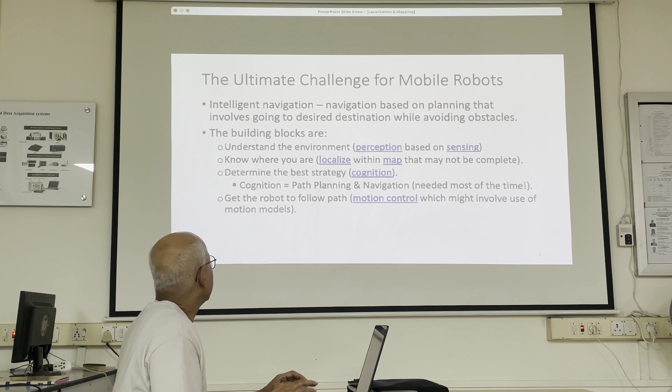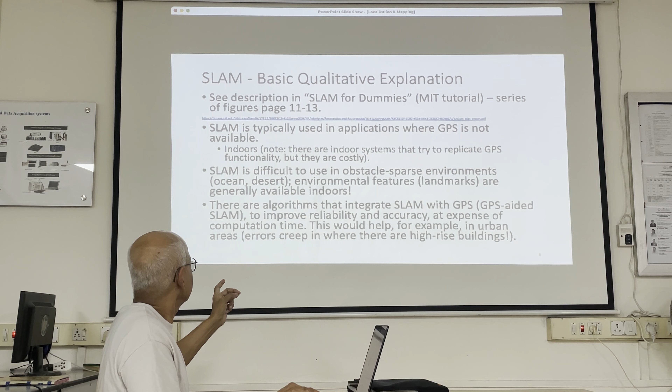So yesterday, I think we went through all of this and this one and this one. I know exactly where I stopped, because I was telling you that you can do SLAM with Bluetooth.

If you have odometry and there are Bluetooth sources, like every cell phone is a Bluetooth source, it is possible in a room to locate someone accurately with Bluetooth as well as locate a robot with Bluetooth and odometry. We also pointed out the two classic papers on this, the guys who came up with SLAM, Hugh Durrant-Whyte and Tim Bailey.

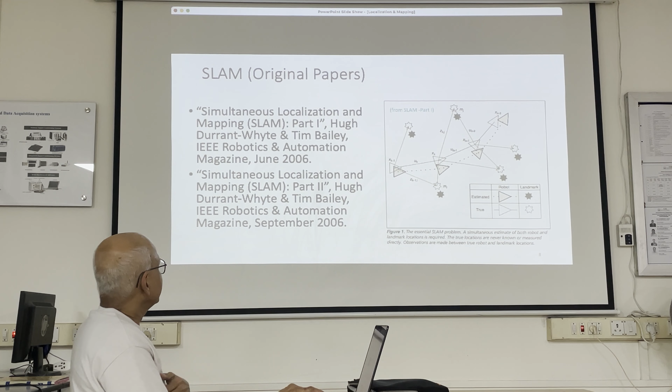So we are going to discuss the challenges of localization, because it's not a problem that's going to be solved anytime soon. First of all, you can't get 100% accuracy. Nothing is 100% accurate in the real world. But also, it's a problem where the accuracy has to be incrementally improved. Some applications need higher accuracy than others.

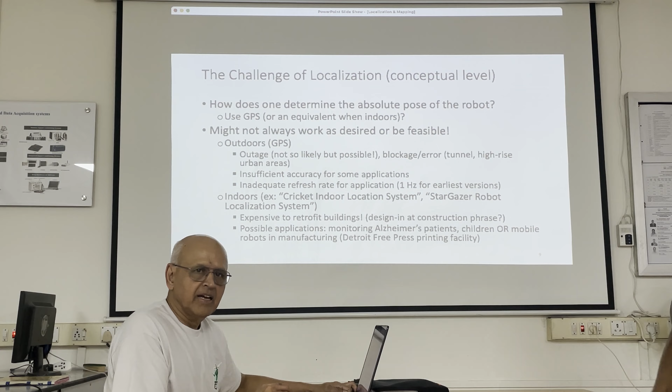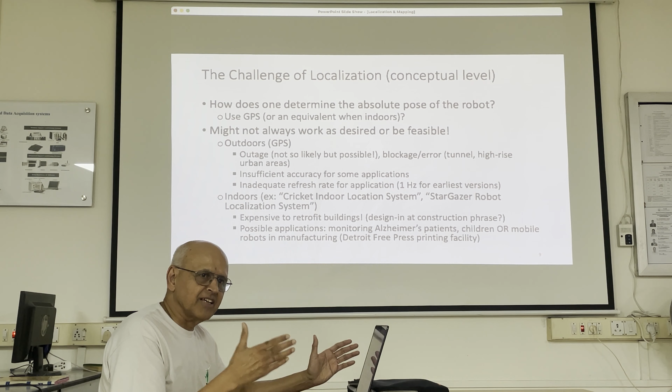The example I gave you was that if you have a robot navigating a minefield, the accuracy required is something different than a robot going down the hallway. Similarly, if a robot is going next to a swimming pool and it's not waterproof, then it's got to be extremely accurate in its localization because it can't fall into the water.

So the question is, how do you determine the absolute pose of the robot? Now, GPS can be used outdoors, but there's no GPS indoors. We talked about some of the problems of GPS outdoors also, such as you can have outages, and you can have outages that are actively caused by countries nowadays. They're all preparing that if there's a war, they want to black out the GPS of the opposing country.

Elon Musk has all these satellites, the Starlink system, so many satellites, and yesterday somebody in Russia was saying that they know a way of knocking out all of those immediately. So outages are possible in that context, but not in a normal context anymore because there are too many satellites.

And then of course, inside a tunnel, you can't get a GPS signal, so you have to do without it. If you're using it to localize, then temporarily it won't be available. You've got to do something else, follow the walls of the tunnel, and then when you get out of the tunnel, pick it up again.

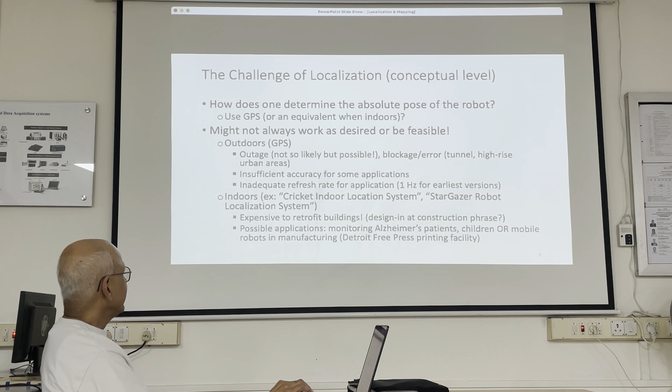In New York City, the GPS signal becomes unreliable because of the multi-path phenomena, bouncing off many of those tall buildings. And then you have this problem that GPS by itself is not accurate enough. You have to do something extra with it to make it accurate.

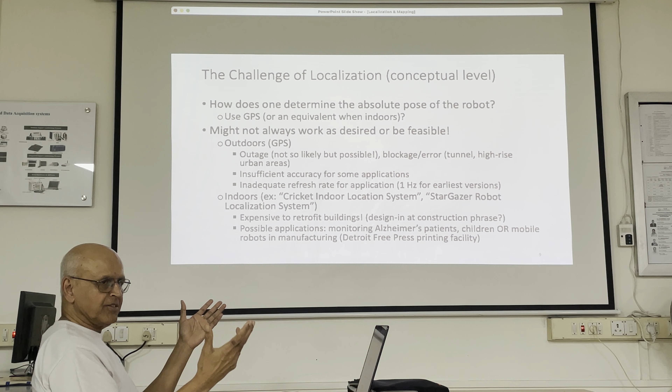The original GPS was accurate to like a meter or more. If you needed to take an exit from a highway, 1 meter, 5 meters, even 10 meters might be enough. But for other applications, it was not accurate enough. And of course, the repetition rate or the sample rate is 1 hertz. So if you're going at 200 miles per hour, then 1 hertz is not going to be enough. If you're going at 50 miles per hour, it might be enough. So everything is relative. A number is not instantaneously good, it is in the context of what application you are using it for.

Now, you'd be surprised, I started to say that and then I looked at this bullet, that there are indoor location systems available now. Now these companies might be out of business, I checked a couple of years ago, Stargazer and Cricket. So they are a means of creating a GPS-like system indoors.

Now, where would they use it? Typically, in cases where you need to monitor patients with Alzheimer's or even children, because you want to give children and even people with Alzheimer's some freedom. You don't want to tie them down or handcuff them to a wheelchair, because that affects the quality of life. So you want them to wander in the grounds of the facility, but not exit the gate and walk across a road with fast moving cars.

So they have this system whereby they're being monitored, and if they get out of the building, there'll be an alert. The way they do that is they all wear tags - these patients and children, same thing. Dogs have tags nowadays, even cattle are given tags, because you don't want the cattle to wander away on the farm. So they do have an indoor system.

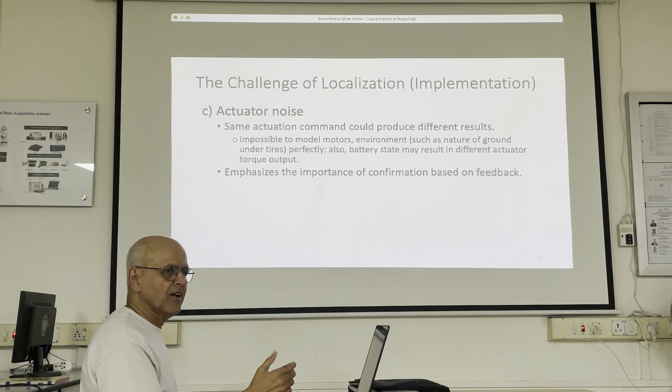You call that noise in the sense that you issue the same command, but it ends up in different places. That's called noise, because there is some ideal place, and there are all these other places that you get. So you can think of it as random around the ideal motion. It could be the ground under the tires. Maybe on a different day, the tires are slightly underinflated. It could be any one of those factors. On the same day, it might happen too - maybe it's a little bit warmer now, and when it warms up, the tire pressure increases. So it could be that. That's called actuator noise, and that's why feedback is so important, in most things in life, but definitely in robot motion.

Now, we already talked about this when we first brought up odometry, but I'll refresh your memory. Odometry uses wheel rotation sensors. I believe I may have shown you a picture of an encoder - it basically has these alternate black and white sectors on the wheel. So when the wheel rotates, a beam of light is interrupted by these black and white sectors, and you can count the number of pulses.

So counting the number of pulses is fine, but isn't there a difference between 2,500 pulses around the circumference and 5,000? Because 5,000 enables you to measure the rollout of the wheel at half the distance compared to 2,500. So if you're turning right in the middle of one tick of the encoder and the next, is it the previous tick or the next tick? Well, obviously you're going to go with the previous tick. But if you put more ticks, maybe you'll get another tick, and therefore you'll be more accurate.

So therefore odometry, for this one reason, can't be accurate, because it might turn in the middle of two ticks, and there's no way you can actually measure that because you only have a certain number of ticks. It won't solve the problem if you have a million ticks. It'll make the product more costly because your pulses are now coming in so fast you have to process it, but you still have a problem of localization.

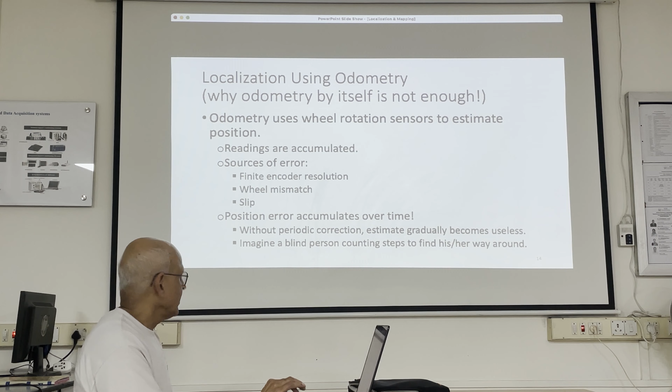And there's the question of slip. So even when you think you're not slipping, you actually are - you just don't notice it. You'll notice it more when there's ice, but even on regular terrain there are little micro slips going on. A micro slip means that you get encoder count, but you haven't moved. So that means there'll be error.

Now, the problem is these position errors accumulate. They add on, they don't cancel out. They keep on adding on. And if you don't correct it periodically - that's the old example, counting the steps, right? At some point you have to look up and say, okay, I'm at the end of the hallway.

Now, it seems silly me saying that because we do it automatically, but to get a computer to do what a human being does is a big task. So we have to think of it as a human being counting steps and then looking at the scenery to see, did I make it to the parking lot? Am I going in the right direction? So you use visual feedback to check whether your steps are taking you in the right direction.

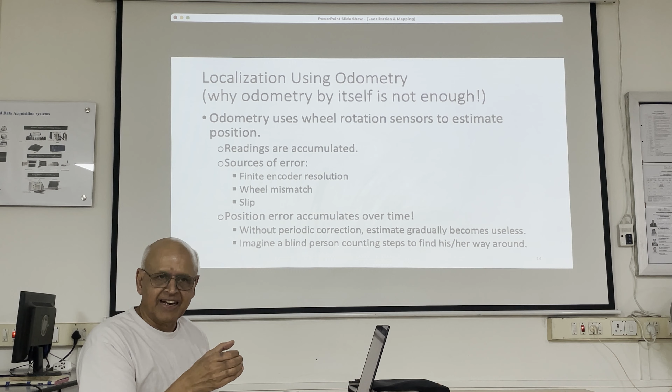So the blind person is the best example of that. A blind person would also be lost, but you know what a blind person does in their apartment? First, they organize the furniture in a certain way and get used to it. If you move that furniture around, you're going to screw up a blind person's system completely, because they depend on that, like a familiar sofa. So they grab onto it, the door of the refrigerator, or the door to the bedroom. That's how the steps, the odometry, is - the steps - and then they correct it by that GPS, their own GPS, which is grabbing something that is familiar.

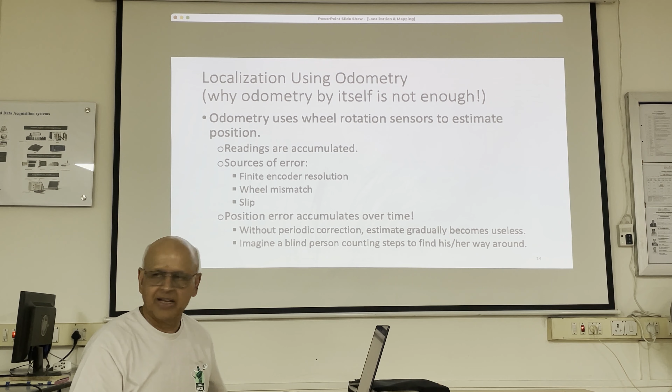So there are three types of error because of odometry problems. One is range error - what is the total distance you have traveled? That is the most favorable of the three errors. That error takes the longest to fall apart. So even with slips and all the other problems, your typical total distance recorded by odometry will have the smallest amount of error. So generally it survives longer.

The culprit is the turn error. Because the moment you get this slip, you think you're facing here, but no, you're not facing there - you just slipped, but you're still facing here. So imagine you think you're looking here, but now you're looking here. Now, if you proceed on these two diverging paths, you can never recover from this, because now you think you're pointing here, but you're pointing here. But now these two paths are going to fall apart, diverge, from that point onwards. So that's why the turn error is deadly.

And if you have more turn error, the odometry will fall apart sooner, and you'll be praying for GPS or some other form of correction. And drift error is the accumulation of the turn error - so turn error accumulates, and that's called drift. So it's definitely not self-correcting. It won't correct itself, you actually become worse and worse. So you'll see in the form of an experimental study exactly what happens to it.

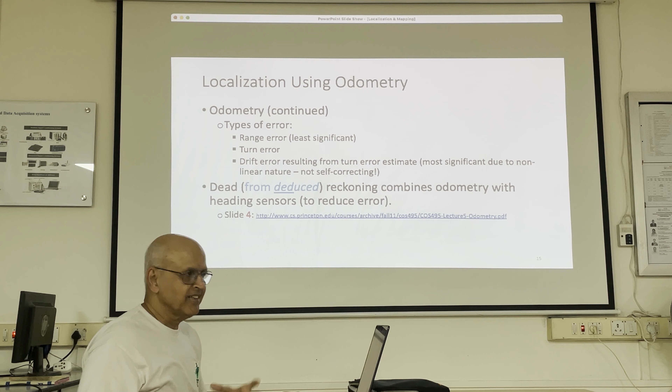I just told you that turn error is the worst possible thing that can happen to you. That's why sometimes people add heading sensors, not quite GPS, but heading sensors like a compass. So you can immediately correct because the compass will still point in this direction. So if keeping odometry alive longer is more important to you, add a compass to it, and it will compensate for turn error.

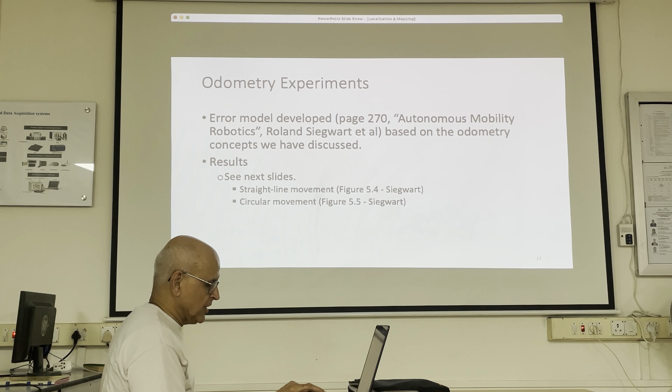In this book, which is a popular autonomous mobility robotics book, this guy Siegwart is from one of the top robotics schools in Europe, ETH Zurich in Switzerland. He did a study, though actually I think it's from his book, but not his own study. These figures are produced from that study, and there are two of them, the next one on the next slide. Let me explain what this is.

I don't know what your exposure to probability is, but I'll explain it intuitively. Many things in life are governed by the Gaussian distribution, also known as the normal distribution. Like heights of students in this class, there's going to be a spread, and typically it will fit a Gaussian.

If I pick you up, turn you upside down and shake all the change out of you, we'll get a distribution. There'll be very few people with 1 crore in their pocket, I don't know, maybe you. So there'll be very few at the two extremes, or zero, but a lot more in the middle. That's what the Gaussian is, it represents the law of life.

Most things, not all things, are Gaussian distributed. Most things are. The point when we die, definitely Gaussian.

There is a probability that you can get infinity, but the chances are low. You can get a point way out on one side or the other, but the chances are very little. What is the probability that a person is 15 feet tall? I haven't seen anybody like that. Probably not. So all the extremes live on the wings of the Gaussian, and the chances are not much.

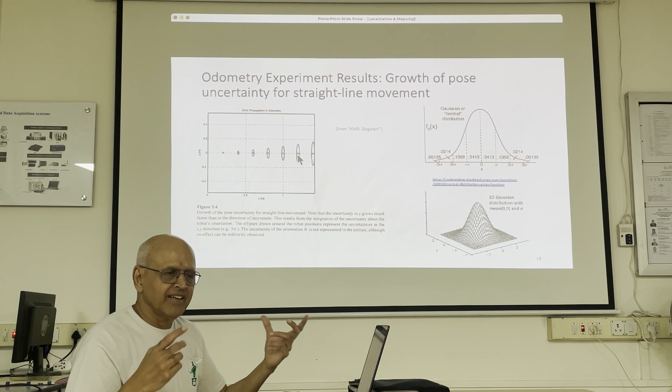So this is a two-dimensional Gaussian, drawn as an ellipse to show you a two-dimensional Gaussian. In other words, it's a projection, a section of this, maybe at 3 sigma. Imagine a 3 sigma cut. Remember, 1 sigma cut for a one-dimensional Gaussian is here. Similarly, for two-dimensional, you have to do two of them. So he's doing a 3 sigma cut, and what does it show?

Remember I told you the range error is the least? Well, the Gaussian is not growing much in this direction, so the uncertainty is not growing very fast here. This way it's growing quite quickly. What's the reason? The turn error. It says there's a chance it could be here, or here, or here, and that chance seems to be expanding sideways as you go. That's what I meant—odometry is going to fall apart, and the turn error is the culprit. Range error is fine because it's compressed this way, it's expanded out this way. That's the problem with it.

Now, this is this old circle. So he gets the robot to move in a circle, and this time the ellipse is like this, getting bigger and bigger. Something odd is happening here.

You would think that it would grow perpendicular to the path, but here's a comment that says the main axis of the uncertainty ellipse does not remain perpendicular to the direction of movement.

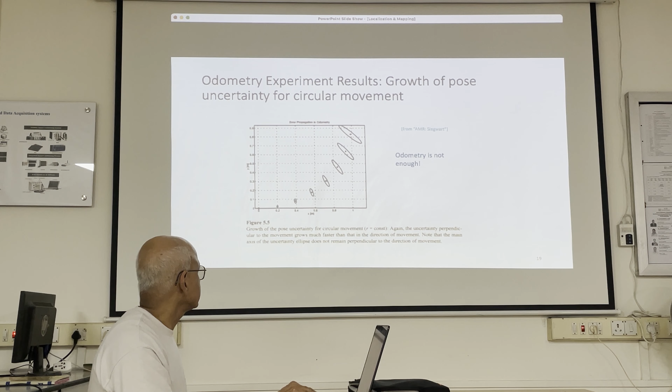So odometry is not good enough. It's going to need help, right? We know that. It's like counting steps, and then you have to look up every once in a while. You don't have to look up constantly, though human beings do.

Actually, we don't do that. We look at our cell phones a lot these days. So have you heard about these stories of people looking at their cell phones, walking down a sidewalk, and running into a pole? Very true.

So is that localization error or just stupidity? It could be stupidity because they don't have a map of the environment in their heads, right? They're just counting steps in their heads and walking, looking at the cell phone, and they hit a pole. There have been people who have stepped into traffic and got killed. Like they don't realize that it's a red light, and they walk right off and get hit by a car.

So you need help. So what is this help? GPS is the easiest way to do it. Indoors there's no GPS.

You can also do IMU. So IMU replaces odometry for skid steer vehicles. For vehicles that move without rolling tires, right? Well, skid steer vehicles also roll, but when you turn, they have to skid. Because how do you get from here to here when you don't have a steering wheel? You have to run the left wheels faster than the right and you skid this way, just like a tank.

Some people use IMU and odometry because remember, redundancy is good. So some people, they want a good localization system. They add an IMU even though they have odometry. Then you have a three-way fusion of information: IMU, odometry, and GPS.

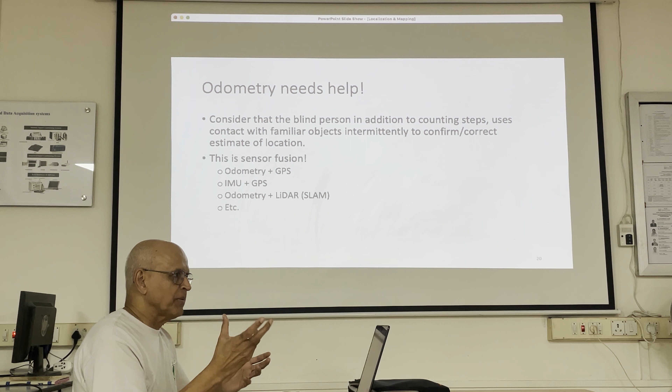So there was the story of a lady in the middle of winter in Montana. She went off the road, snow everywhere, and was in the ditch. She had not told any of her family or friends where she was going. And they located her just from the Wi-Fi signal. So that is a kind of Wi-Fi SLAM in a way, because they found her before she died, as the cold would have killed her. They located her purely from her cell phone signal to the towers.

Now we're going to watch this. We just watched it a couple of times already, right? But it's a very nice video that illustrates the concept of SLAM. Now, I keep telling you this, if you get into the math, then you're going to commit suicide. So the math should come later, maybe much, much later. You have to understand the concept first of what SLAM is. So let's play this video.

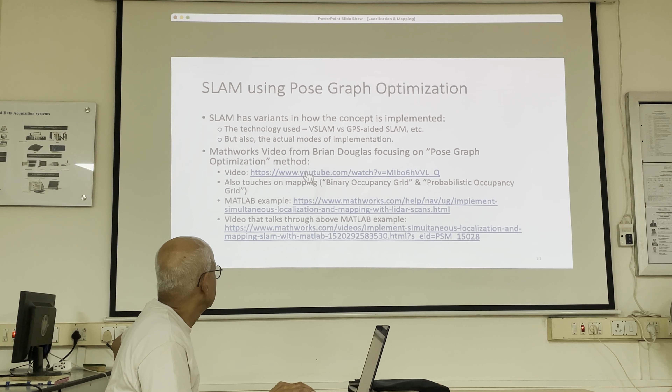That's not the one. What is it doing? This is a CNN... this happened to me a couple of times yesterday and I couldn't figure it out. That, and this morning I tried it, it gave me the right one. Now it's a CNN news item. So I'm going to cut and paste it this time. Let me, or maybe I'll just Google it, because it might do the same thing.

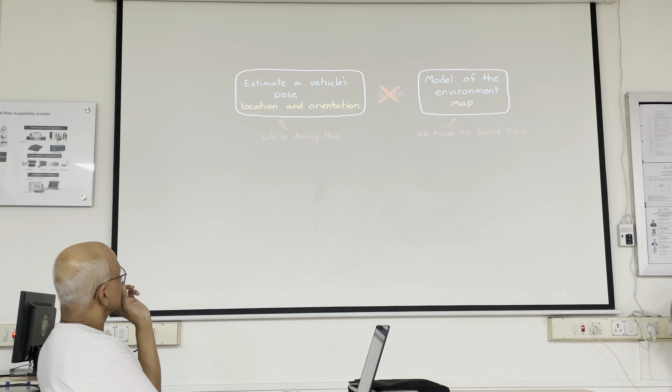In the last video, we talked about how we can estimate an autonomous vehicle's pose, that's its location and orientation, if we already had a model or a map of the environment. In this video, we're not going to have a map ahead of time. We're going to have to build one while simultaneously figuring out where the vehicle is within that map using a process called SLAM, Simultaneous Localization and Mapping.

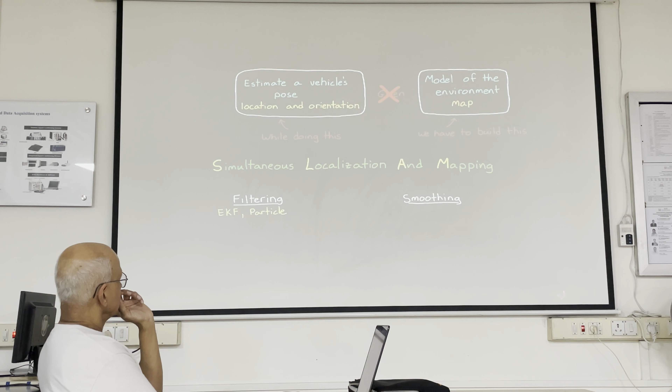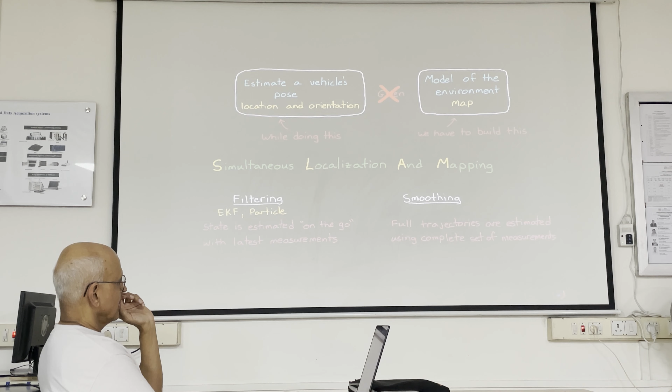There are many different SLAM algorithms, but they can mostly be classified into two groups, filtering and smoothing. Filtering, like the extended Kalman filter or the particle filter, models the problem as an online state estimation, where the robot state, and maybe part of the environment, is updated on the go as new measurements become available. On the other hand, smoothing techniques estimate the full robot trajectory from the complete set of measurements, not just the new measurements. Understanding these methods can be more intuitive if we address them under a graph-based formulation.

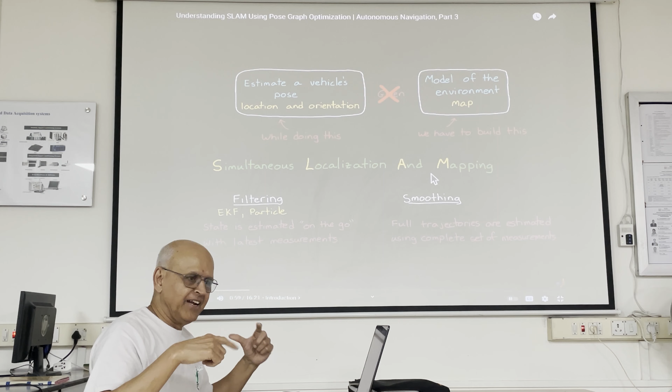So let me give you a little bit of background. This was a classical technique, which is what I was describing to you yesterday in class. So you keep going, the barrels move, right? And every time you get a LiDAR view of the barrels, you again correct your position, because you've seen them from a different position. Odometry tells you how far you've moved. You take new readings using a LiDAR of these very same obstacles, and using that you're able to correct your position. So you never return back to things you've seen before.

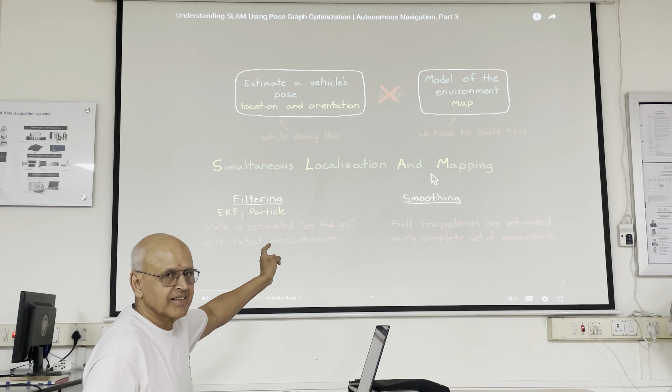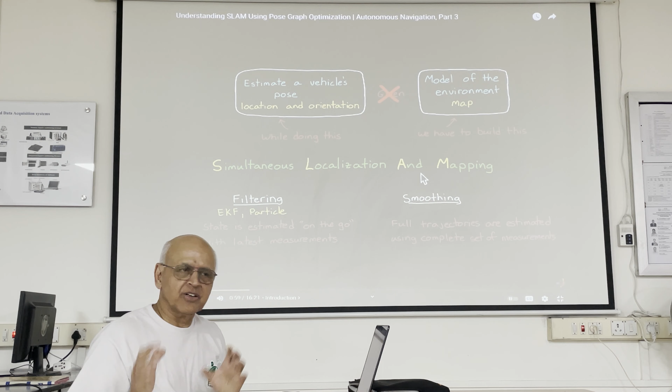So that's the filtering method. The problem with that is you have something we already used the word drift. The error, even though it grows slower than with odometry alone, does grow. So it keeps growing. The second method I'm going to talk about uses a method known as pose-graph optimization. That method is known as the smoothing method.

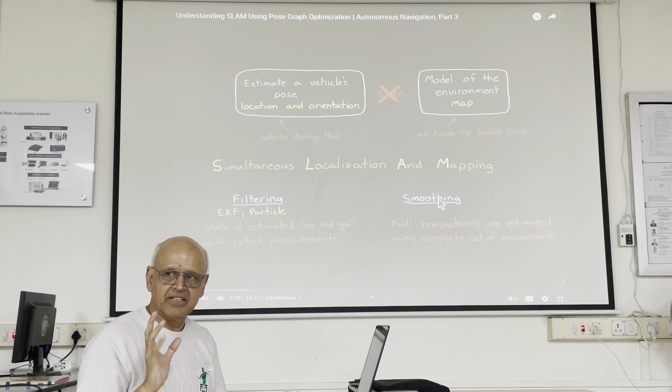But it requires you to revisit the parts of the environment that you have seen already. Now you can see, this is one of life's trade-offs, right? Life is full of trade-offs. You won't get something for nothing. You always have to give up something to get something better.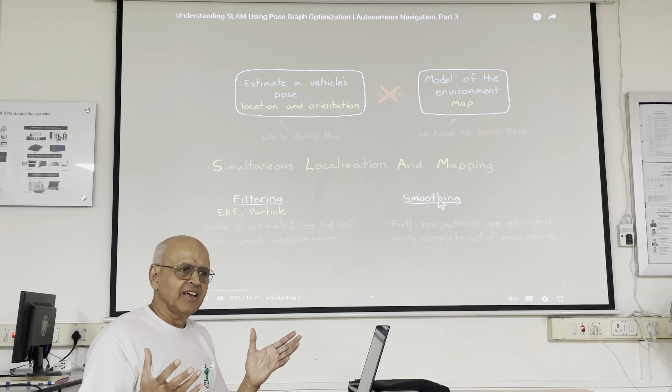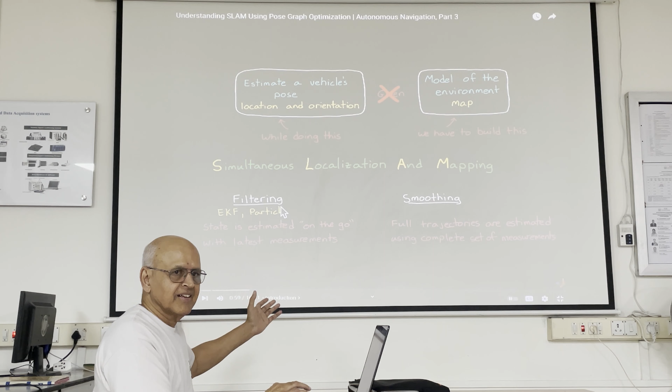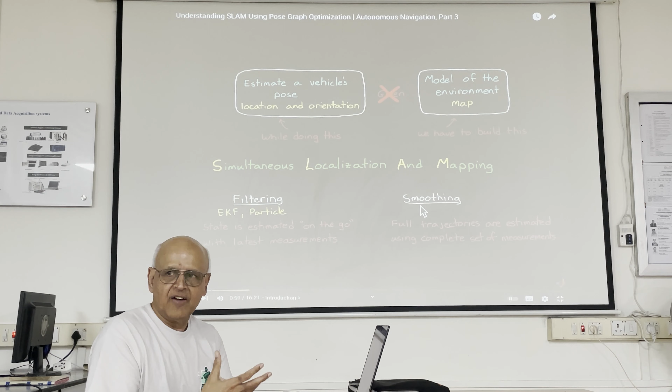So what is the problem with going back to previous areas? If you're in a battlefield and you're developing a map as you go, you don't have the time or the luxury to go back and make your SLAM more accurate. You have to keep going. So you're forced to use the filtering method. This doesn't require you to revisit areas that you've already been in. In an earthquake, when people are dying, you're not going to even have the time to do that. Yet it's a better method if you have time. And apparently most people use this method, provided they have the time, of course.

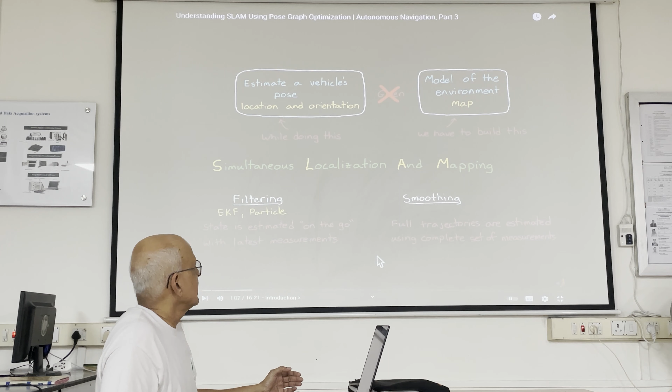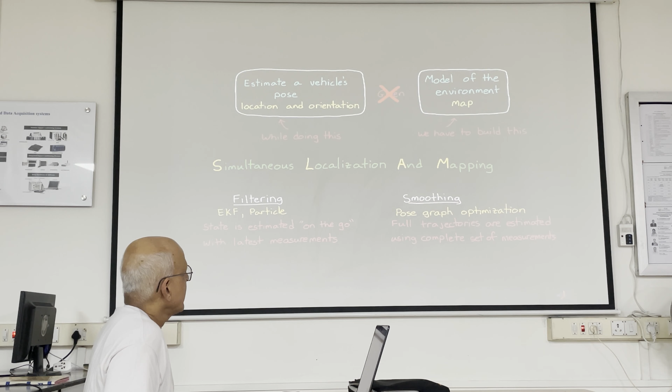So let's continue. In recent years, one particular framework, pose-graph optimization, or more generically, factor graph optimization, has become the de facto standard for most modern SLAM software solutions. So in this video, we're going to focus on understanding what pose-graph optimization is and why it works. I hope you stick around for it.

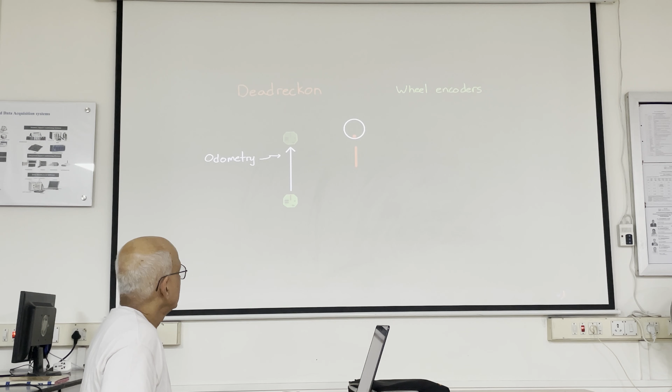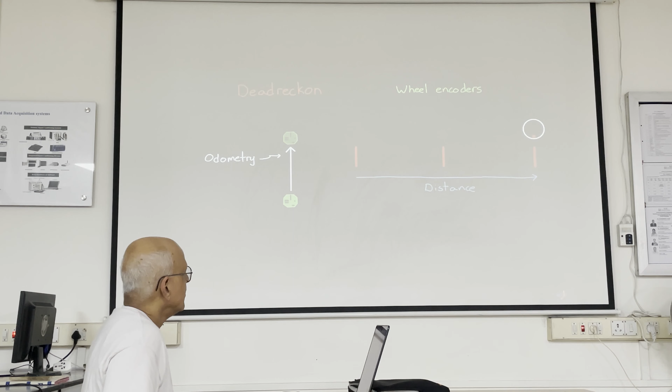Let's set up the problem. We have an autonomous vehicle, a robot, that has the ability to move through an environment. We've given it LiDAR to sense the distances and angles to nearby obstacles, and we've given it a way to dead reckon its relative position over time using odometry. In this case, it uses wheel encoders to count the number of rotations each wheel makes as it drives, and from that it estimates how far it's gone and how it's turned since its last known position. So the question is, how can we use these sensors to understand what the environment map looks like and figure out the robot's pose over time?

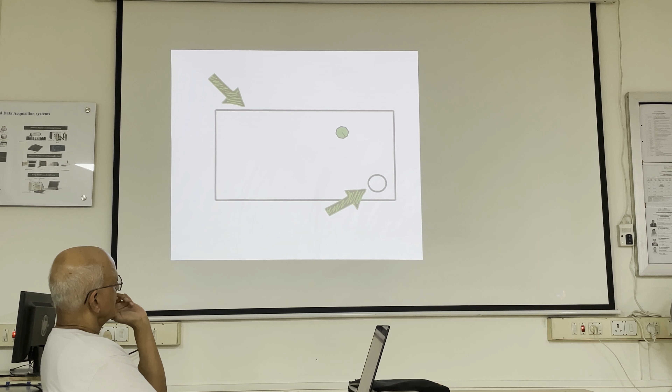Well, let's start with a simple mapping problem. Here I've placed the robot in a rectangular room with a circular obstacle in the corner. We can see this map and see where the robot is, but it has no idea of either. To it, it's just in an unknown void.

Let's start with a very ideal situation, one in which there is no uncertainty or errors in the LiDAR or odometry measurements. They're just perfect.

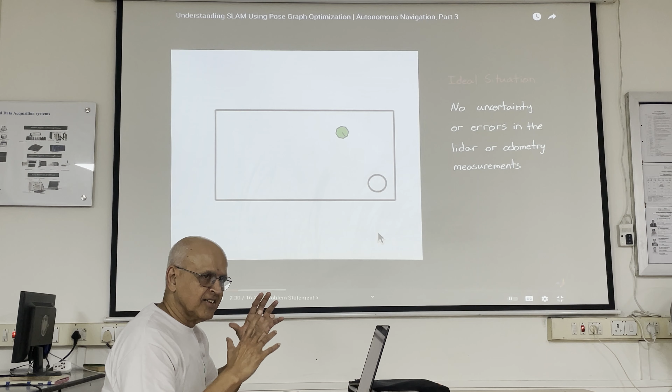So that's not possible, right? So he's assuming that just to make a point. You'll see how easy mapping is now in that scenario.

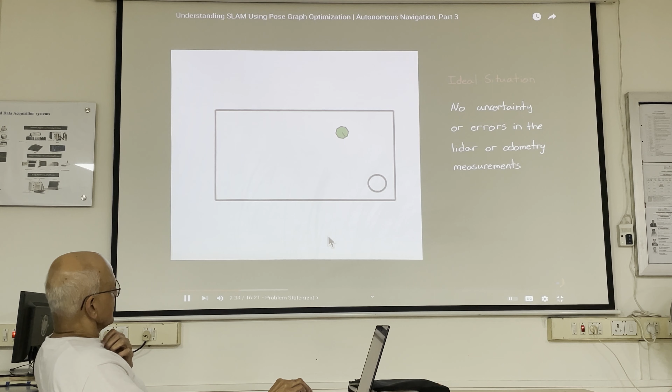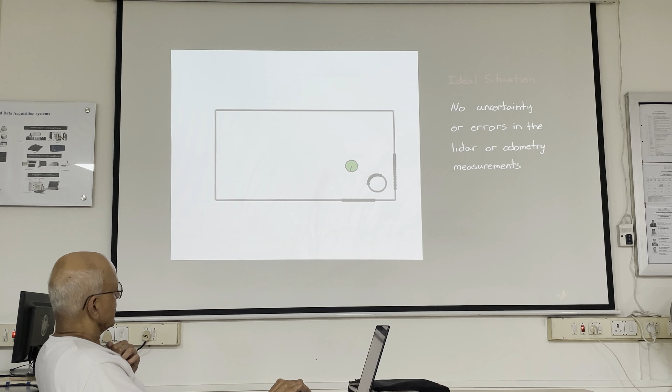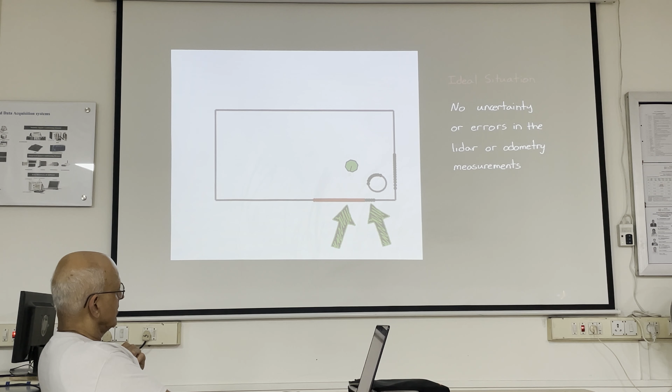In this situation, developing a map of the environment is relatively trivial. The robot could take a LiDAR measurement, and we'd have confidence that what it measured is the real obstacle location. It could save that off in a global map and then continue on. After driving some distance, which again, precisely because of the perfect odometry, it takes another measurement. Now the two measurements will align nicely in the global map since there are no errors in our system, and in this way we can just keep driving all around the environment and create a perfect map, all while knowing exactly where we are at all times.

Of course, this scenario isn't realistic. There's error in both the LiDAR measurement and in the odometry, so there's some uncertainty in the estimated robot pose and in the distances to the measured objects.

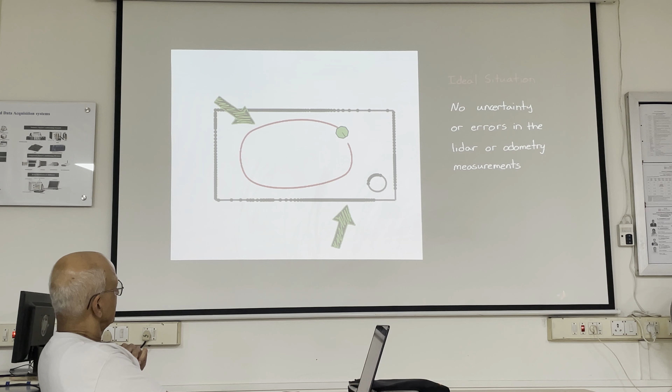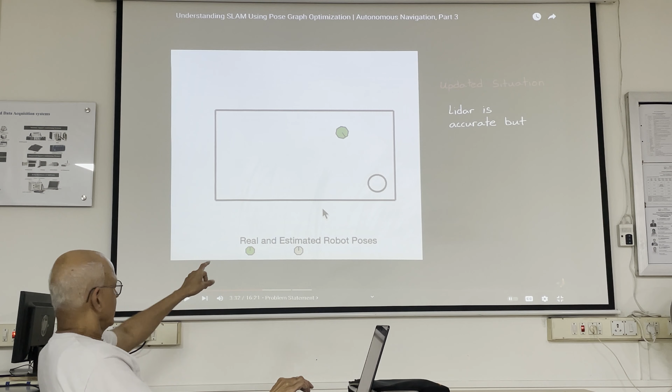So let's try to map this room one more time. But this time, the LiDAR is still pretty accurate, but there's a large uncertainty in the odometry measurements. Green is the true position, and gray is the odometry position. I don't know, maybe one of the wheels keeps slipping, so the robot thinks it's moving in a different direction than it actually is. So let's see how this works out for our robot.

We get an initial LiDAR measurement, and we assume that there's an obstacle there just like before, and then we drive a little bit. Except this time, the estimated pose is different than the real pose. So the LiDAR returns some relative distances to the wall that the real robot sees, but we can only assume that it's relative to the estimated robot pose, since that's all we know. This places the two measured obstacles in different frames, and not a global environment frame, so they don't line up.

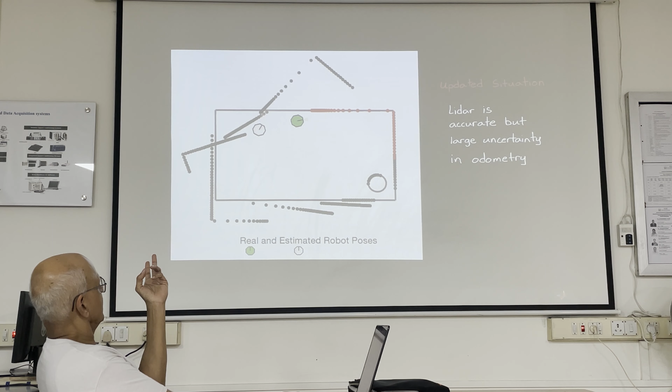If we continue this process, as we drive the robot around the room, the error in odometry causes our estimated pose to deviate more from the real pose, and what we're left with in the end is this map of obstacles that doesn't resemble the real environment. So this is one of the reasons why we can't just take measurements of the environment and stick the results into a map. Uncertainty in our system is going to mess it up.

But this is where SLAM algorithms can help us. As I said at the beginning, in this video we're going to focus on pose graph optimization. I want to provide a little intuition behind the algorithm and give you a feeling for how it works without a bunch of math. But if you want to learn more about the mathematics, I've left some great resources in the description that go through it in detail.

Just like before, we have our real and estimated robot poses, which at the beginning lie right on top of each other in the real environment map. But now on the right, there's also this blank area, and this is where we're going to build up the pose graph. The first thing our robot does is take a measurement of the environment.

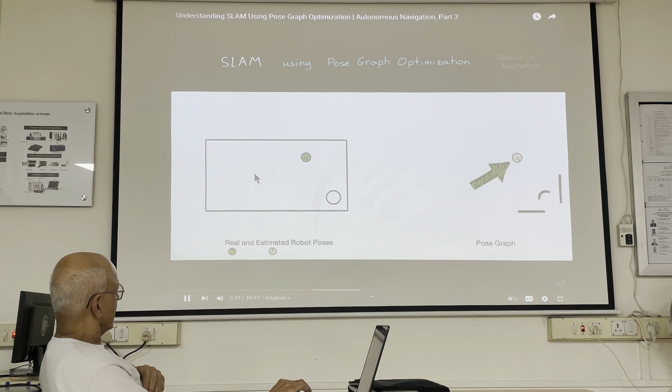This measurement is associated with the current estimated robot pose, and we can add both to the pose graph. So essentially what we're doing is saying that this pose is defined as an X and Y location and a rotation angle. And along with it, we save off the distances and angles to the sensed obstacle.

So he's saving both the odometry pose as well as the view. So it's a lot of memory. And you have to do a lot of calculations, right? We're not doing the calculations, but you'll understand the concept when he finishes up.

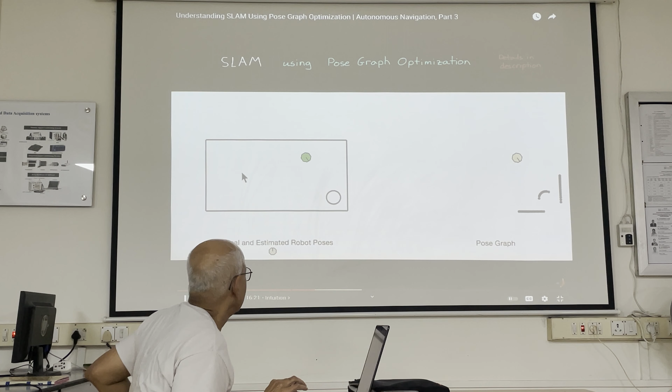Now, there's also uncertainties associated with this pose entry, but I'll get to that in a second. All right, so we have our first entry in the pose graph, so let's get the second.

Again, the robot drives for a little bit, and our estimated pose starts to deviate from the real pose. Another measurement of the environment, which gets associated with the new estimated pose, and this combination is now saved in the pose graph. So we have two poses, each with their own local estimate of where the obstacles are.

And even though we don't know where these two poses are in the environment, we do have an idea of about how far apart they are from each other. In our case, this knowledge came from counting the wheel rotations. But the idea behind this SLAM algorithm isn't tied to a specific set of sensors. The relative pose distances could have come from another internal measurement source, like an IMU, or we could have figured out how far the robot moved from other external sources, like GPS or visual odometry.

The point is that we have some best guess as to how far away these two poses are from each other, as well as a measure of how confident we are in that guess. There's a constraint we can place on the relative distance between these two poses. Ideally, they would stay exactly this far apart, since that's our best estimate. But due to uncertainty in the odometry process, maybe we'd be better off if we moved these two poses relative to each other. It would be nice if there was a mechanism to move the two poses to align the currently misaligned obstacles. Well, there is, and the constraints are the key to doing it.

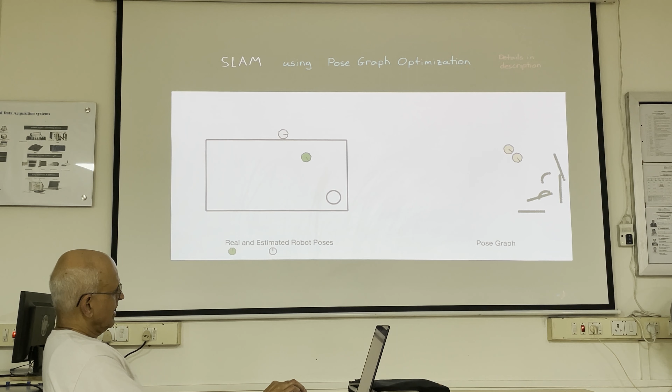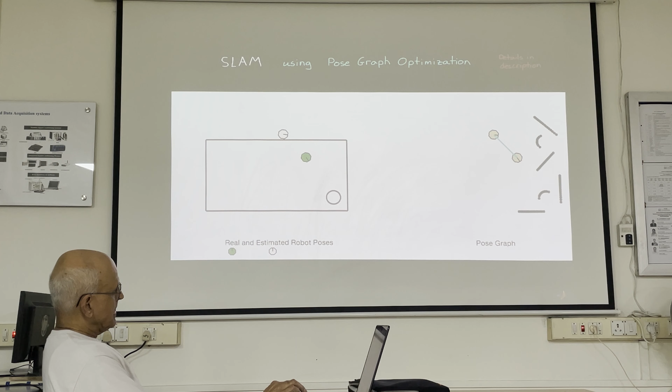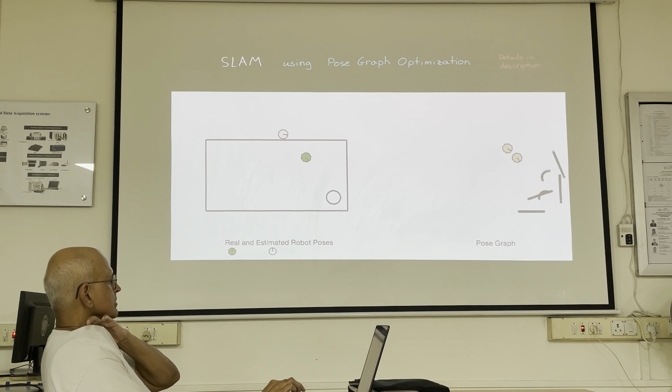Our first pose and the current pose are both observing the same feature in the environment. This means we can build a new edge, a new constraint between these two nodes. We just need to understand how these two features align to figure out where the two poses have to be relative to each other. In this example, they would have to be in the exact same location. So now we add a new constraint connecting the first and last poses, closing the loop. This bar has a nominal length of zero, since these two poses want to be right on top of each other. The strength of this bar depends on how confident you are in your external measurements and your ability to associate the two sets of data as the same feature. If you're really confident, like in this example, this bar is extremely strong—it really wants to pull these two poses together.

Hopefully you can start to see that a loop closure is the thing that makes all of this work. Without a closure, all of the constraints were just happily being met. But with a loop closure, we have a way to inject tension into this graph. The blue bar wants to pull those two nodes together, and the purple bars all want to keep the relative distances the way that they are, allowing this graph to settle to equilibrium.

So you see what's going on? He's not just making this the same as this—he has to figure out what to do with all the other positions also, and the algorithm allows you to do that. Because you know that this and this are essentially the same, since you're looking at the same obstacle, you have to adjust all of them, not just the closest two links.

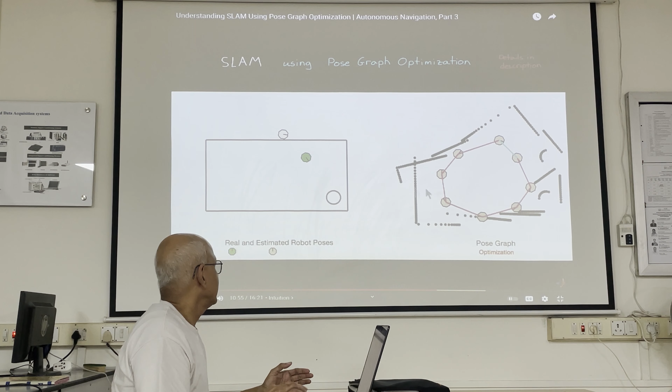Balancing all of the forces that each of the constraints are imposing is the optimization part of pose graph optimization. What's really cool is that by optimizing the pose graph, not only do we have a better estimate of the current pose and a better model of the environment, but we also have a better estimate of where the robot was in the past, since all of the past poses were updated as well.

So we got a lot of value from this one loop closure. Of course, we don't have a perfect model of the environment or the robot poses, but that's okay because we can continue to improve our estimate by making more loop closures. The robot can continue to drive, adding new poses from odometry and new loop closures wherever it's able to determine a relationship using external data.

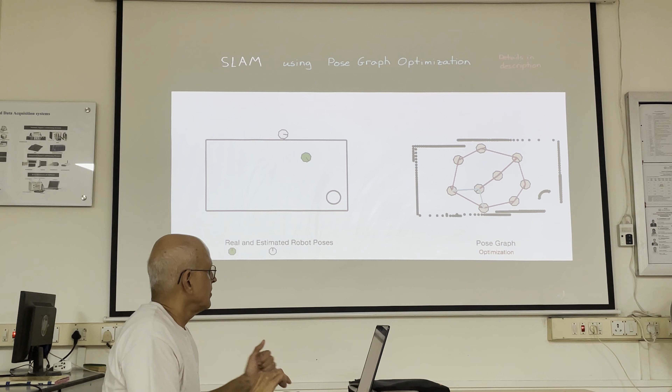For this example, let's assume we were able to relate these three poses together, even though this area of the room is relatively featureless. At this point, all of the previous constraints are the same as they were before, and until we added these loop closures, the graph was still in equilibrium. But now we've added new loop closures, and this has created more tension, which wants to tug and push on all of the other poses a little bit, so we need to rerun the optimization again and allow the graph to resettle. In this way, after each loop closure, the graph will continue to improve its global model of the environment and the past robot poses.

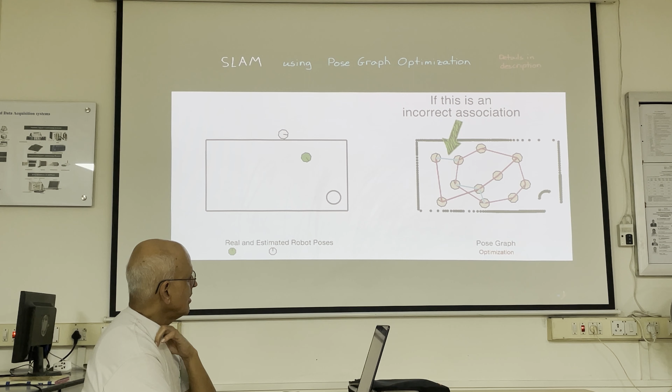That is, as long as the two poses that you connect are truly looking at the same environment feature. If you make an incorrect association and build an edge with a constraint that is not real, you can imagine how this would persist in your graph and continue to skew your optimization process every time you run it.

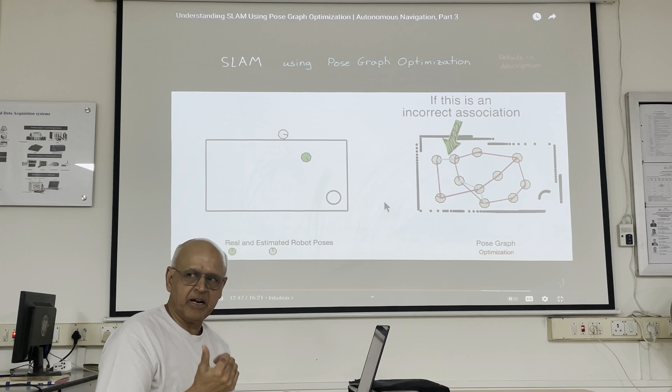So what he's explaining here is, remember I told you about doors that look alike, sensor aliasing? You run the risk of thinking you're looking at the same scene, but maybe because it's a similar barrel, you made a mistake. So once you throw in that piece of data, it's actually going to go the other way and you're going to lose accuracy. So he's saying be careful. If you're not sure, don't add the new scene, just skip it. It's better to be sure before you do the loop closing over and over again. So it's not an easy problem, but we don't have to have 100% accuracy to succeed. We just have to have good accuracy for the mission you're doing. It's always the case that engineering systems are built for a mission.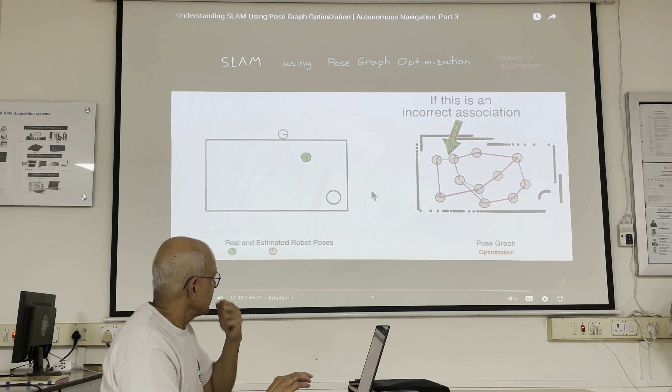It would always be pulling those nodes in a direction away from the truth. So it's incredibly important that you are confident in any loop closures that you make. In fact, it's better to miss a real loop closure than it is to add a false one. You can always drive around some more and make another closure in the future, but it's harder to remove the bad ones once they're in.

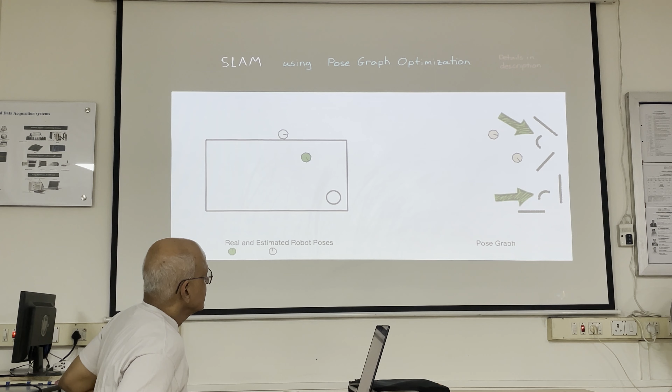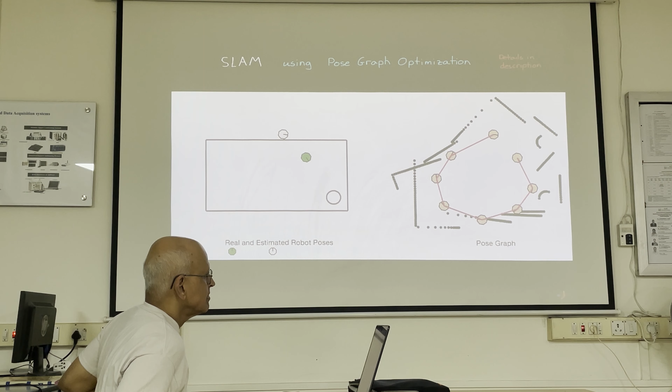It's also important to note that a loop closure requires an absolute measurement of the environment, like we got with LiDAR, or you could get with a visible camera or some other environment sensor. You can't close the loop using a relative sensor like an IMU or the wheel encoders, because there's no way to relate that information back to an older pose. You may think you're near a past node, but without checking the environment, you can't know for sure.

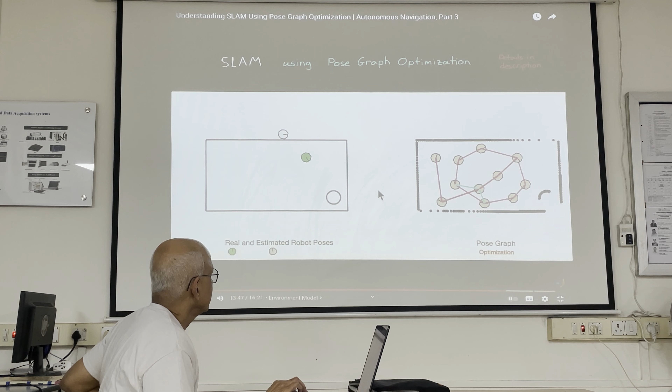Okay, so we have our pose graph and we've optimized it. Now, how do we build a map of the environment from all of these data points? So localization and mapping, right? I told you, you're going to see a little bit of mapping, or this is it.

There are several different ways to represent an environment model, but I'm going to quickly introduce the binary occupancy grid. The idea behind it is that the environment is broken up into a grid of cells. If you believe the cell is occupied, you set the value to a 1, and if it's not occupied, you set it to a 0. Here, I'm assuming the entire environment is empty, and then filling in the cells where I believe there is an obstacle.

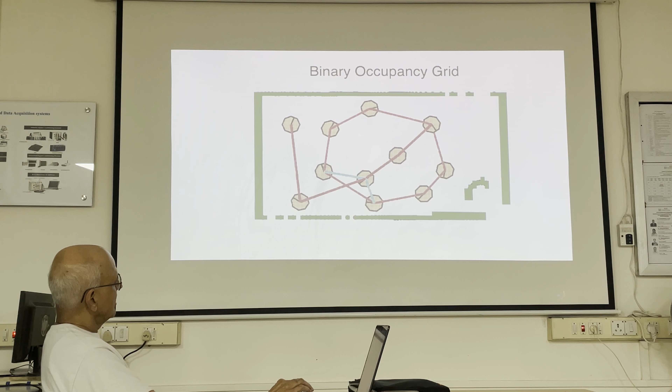You could also assume the opposite, where the cells are all occupied and you set them to 0 when your sensor indicates that there's nothing there. With just 1s and 0s, we've generated a pretty accurate model of the rectangular room.

The problem with these kind of tiles is that even if a cell is only partially occupied, you're going to block the whole thing, because there's no such thing as partially blocking a cell—either it's blocked or not. So you're actually approximating. If that blocks, it can result in a robot saying, I have no path to the goal, because partial coverage blocks both cells, whereas the TurtleBot 3 might actually be able to squeeze through.

The only way to avoid that is to go with smaller cell size. But when you go with smaller cell size, the memory for the map increases. Life is full of these trade-offs—you take some pain to get some gain. If you make the tiles smaller, more memory is used in representing the map. Just imagine how much memory you'd need to map an entire area at that resolution. That's what mapping requires: huge amounts of memory.

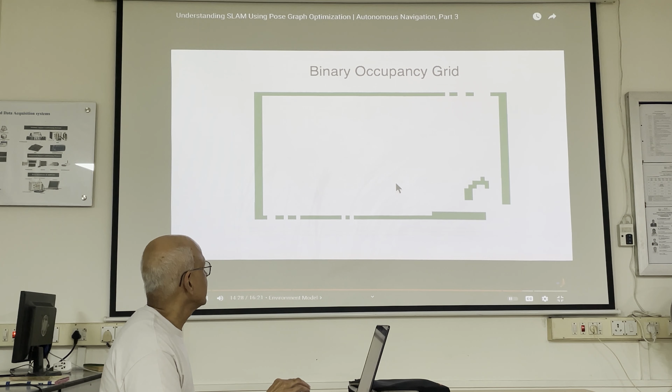Of the circular obstacle, there are some holes, and we can fill them in by driving around a bit more, but overall it looks okay.

There's also probabilistic occupancy grids, where the cell doesn't have to be fully occupied or not—instead there's a probability that it's occupied, between 0 and 1. So here it's not 0 or 1, but a number between 0 and 1, based on how confident you are that there's an obstacle there. Now how do you establish this probability number?

As the robot drives around, the LiDAR sees the same cell multiple times—it's constantly sampling the space above each cell. Either it sees nothing there, or it sees something there. So what they do is have a counter for each cell, and anytime they see something there, they raise the count, maybe with 8 bits allocated per cell, giving a maximum of 255. So they count: I saw it once, twice, thrice. The count might sit at 73. Now the LiDAR is no longer looking at that cell, so you leave it at 73, which maps to a certain shade of gray.

This is needed to detect moving objects. Suppose a dog is walking across the road—you don't want to put the dog permanently on the map because it'll be there forever. So when the LiDAR doesn't see anything there anymore, it erases those cells, counting down from 73, 72, 71. LiDARs go very fast, much faster than I can count, so it counts down rapidly and eliminates that, marking it as free.

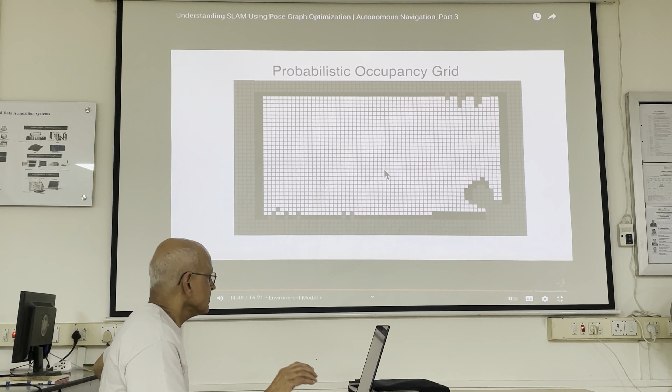That's how a typical map is stored. Even self-driving cars create maps this way, because of very rapid sampling of each cell, which lets you eliminate moving objects from the scene—you don't want a moving object permanently on the map since it's moving. You have full confidence in black and white cells, and everywhere else is some shade of gray, depending on your uncertainty.

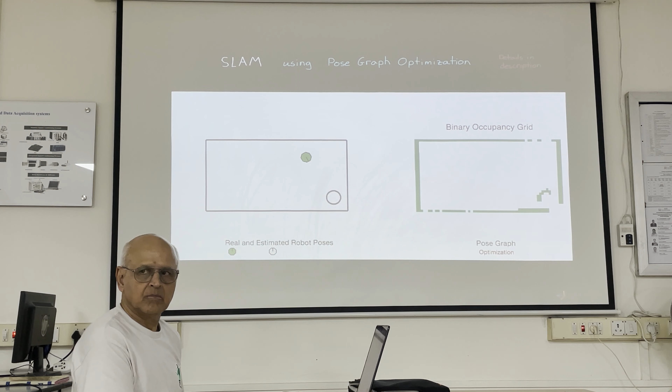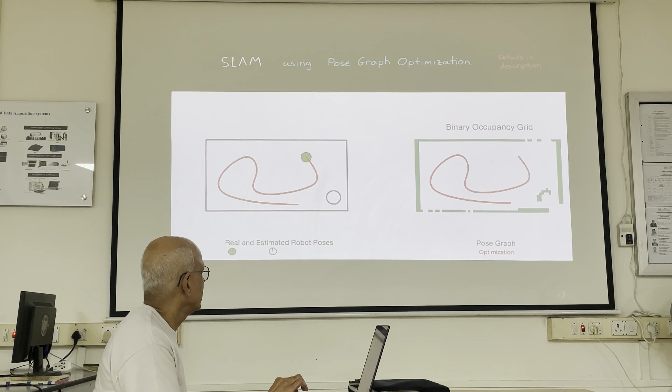So there we have it: SLAM using pose graph optimization. Hopefully now you can see how a map of the environment and the pose of the robot can be determined simultaneously with this method. Now that we have an occupancy grid map, we can start planning a future trajectory through this environment. The robot no longer has to wander around aimlessly, but can use this map to plan where it wants to go. We'll cover some ways to approach planning in the next video.

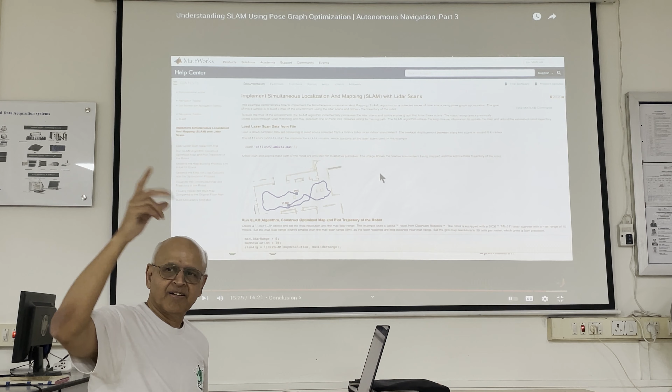But before I end this one—so, Blessed, this is what I was telling you about. He's got the whole program there and goes through all the details of whatever he talked about.